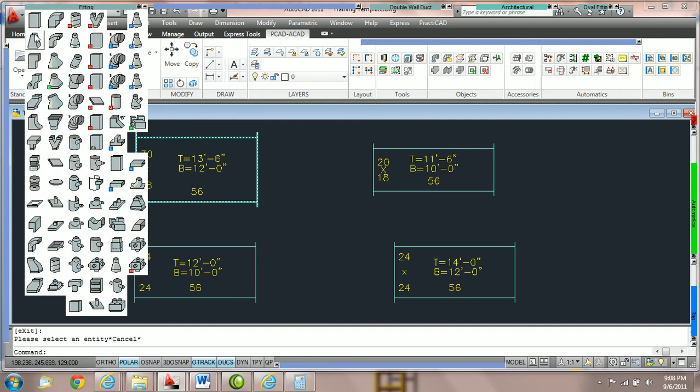The first thing you must look for is to make sure that when you attach duct, you always have your O snaps on. If I do not have O snaps on, when I go to grab a transition, I will be unable to even snap to the duct that I'd like to attach to. So I've always got to make sure that O snap is on.

I can get that on by hitting F3, which will toggle it on, or you can just come right here and press it and turn it on when you need it.

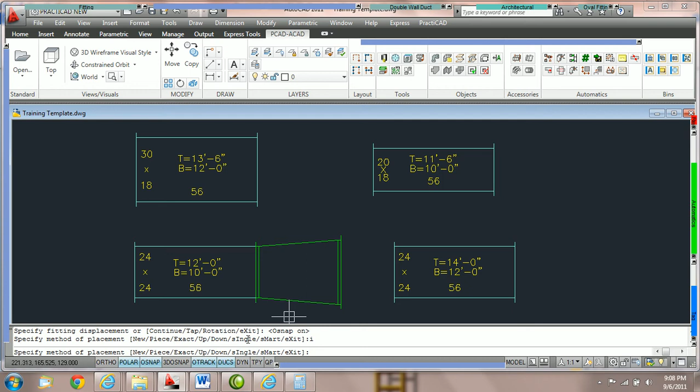Once your snaps are on, you should be able to snap directly to one fitting. And then, of course, by hitting I and spacebar to switch it to the single method, notice that I've got it on single now. I can now come over and easily attach to the other fitting.

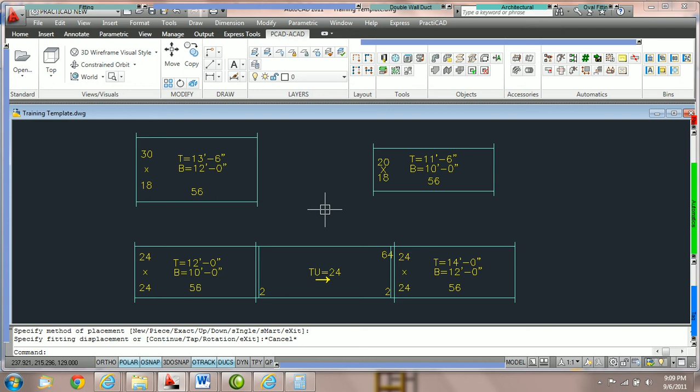However, there are multiple cases where you might not be able to attach duct between two fittings based on a variety of parameters. The easiest solution, the first thing to look for whenever your duct does not attach between two points, is to make sure that you drew your in and out connections correctly.

For example, up top here you can see that when I click on the duct, I have a blue arrow indicating the out joint or airflow of this fitting. If I actually go to click on this fitting, I have the out joint pointing in this direction.

So if I go to attach a transition, I am not attaching the in to the out. I'm trying to attach the out to the out. And there are options in PractiCAD, covered in other tutorials, that prevent you from attaching duct out to out. So in this particular situation, you would not be able to attach it.

The other reasons are either: A, your offset to width parameters are not set high enough. B, the length of your fitting you're trying to route with is larger than the gap it's trying to cover. Or C, you're using the wrong fitting or you don't have it rotated correctly.

So first we're going to go over the explanation of offset to width parameters.

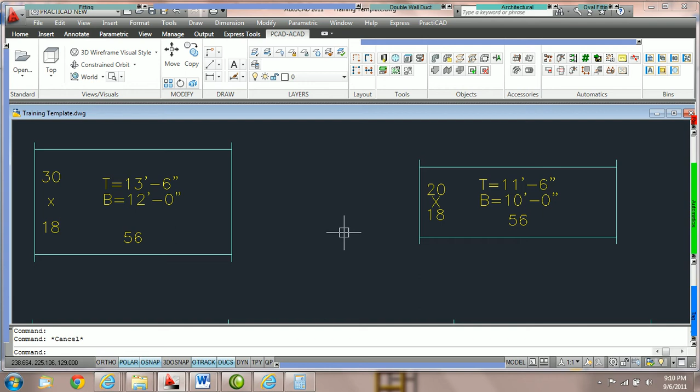PractiCAD gives you the ability to attach a single fitting in between two entities. However, you must make sure that some of your PractiCAD settings are set to allow for this. PractiCAD has the ability to prevent you from putting fittings on the drawing that might choke.

For example, currently I have a piece of duct that's 24 by 24, bottom at 10 foot. And I want to attach it to another piece of duct that's 24 by 24, bottom at 13 foot. Now notice here that we have dimensioned the offset width. The offset width is 3 feet from this center line to this center line.

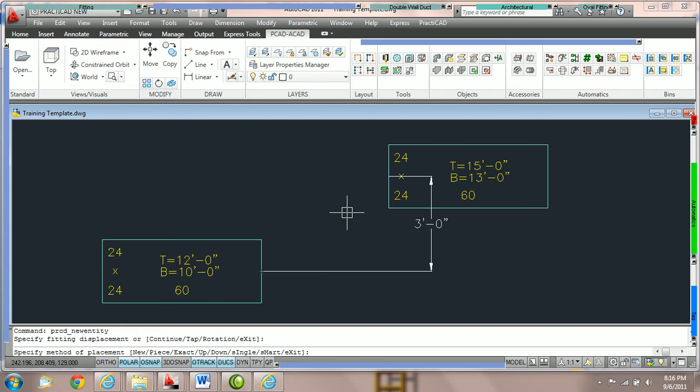I'm going to come up here and grab a transition. I'm going to move over to my box, check single, and now what we're going to do is bring my transition to the first piece. When I click, you'll notice that it snaps to the first piece. Now I'm going to bring my cursor up to the next fitting, but notice that it's not attaching.

The reason why it's not attaching is because my offset to width parameters, or my offset to depth parameters, the ratios are not set high enough.

To change the settings, you must go into your auto duct icon on your PractiCAD ribbon, the auto duct icon. I'm going to click on it once. Now, though there are numerous tutorials on this section, this tutorial is only to explain the importance of the offset width and depth parameters.

Notice here when I'm routing single wall duct rectangular that PractiCAD is giving me a list of different parameters which are dictating the route I'm trying to make. Whenever we go to make a route in PractiCAD, whether it's exact, smart, any one of these routes, it's taking the parameters and choices from this auto duct section. Notice that we've got sizing and offset.

Sizing is used for differences between transitions. Usually it's only a size change. Usually the center line of one duct and the center line of another duct are lined up, however one duct is smaller or larger, so that's a size change.

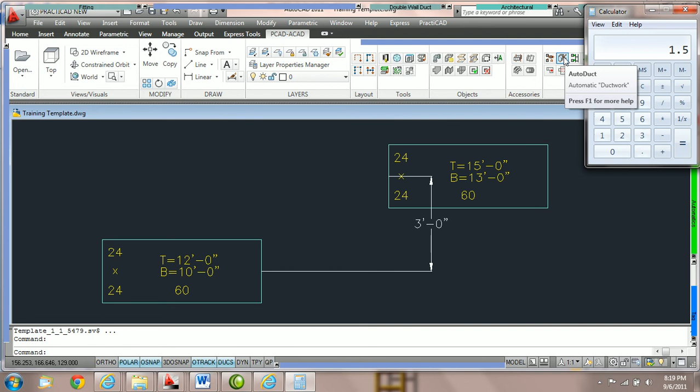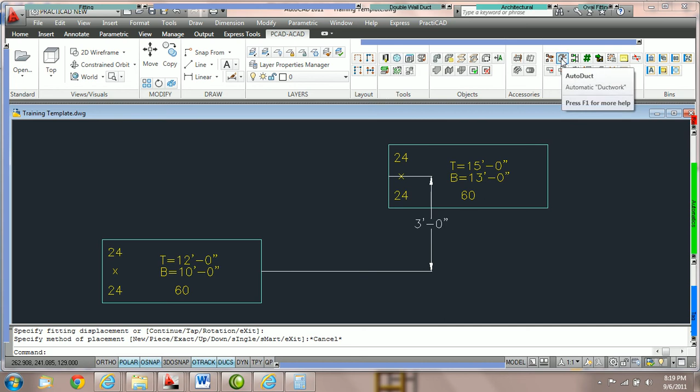This means the ratio I set in my auto duct is actually too low. So if I go to grab this transition and snap to one, then try to bring it to the other, it does not attach. So we need to come back into our auto duct button and change these parameters.

We're going to go into routing, single wall, rectangular. Recognize that you have round and oval here as well. We're going to go into offset, and where it says offset to width, we need to make it at least higher than 1.5.

Now my recommendation is to leave these numbers high. At all times, it's better usually to just have PractiCAD attached between the two fittings at any offset and then edit it later. The recommended settings are to keep this number at a minimum of 8 and 8, or 10 and 10. That'll usually make sure that no matter how great the difference is in height, or how great the difference is in the X or Y plane in terms of width, it's always going to connect the transition. So I'm going to set maximal offset to width and depth ratio to 8 and 8.

It's also recommended underneath sizing to do the same. Here you can see under sizing we have it at 1 and 1, which is only going to allow for a very small offset. We're going to change it to 8 and 8. I try to leave these settings in place at all times. The first thing we check if we cannot attach a duct using the single method is the offset to width and depth ratios. So we're going to exit out, and now we've got them set high.

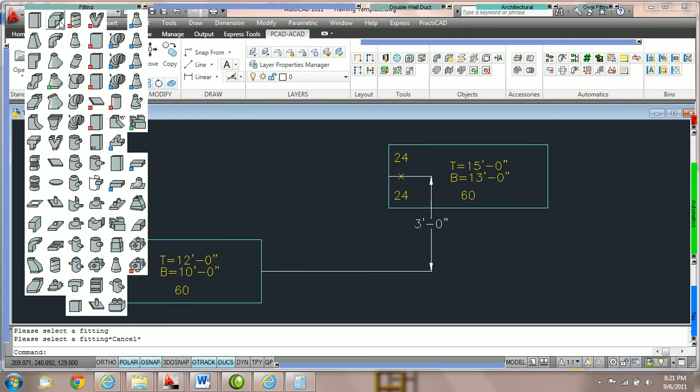Now we're going to go back and grab the transition out of the fitting bin. We're going to snap to our first point, and now notice that the second we bring it to the other point, it will connect. Because we changed the offset to width ratio, which is 3 foot over the width of the fitting we're attaching to, so 3 foot over 2 foot. And of course you have the offset depth ratio as well.

Notice the difference between this duct being at 10 foot and this duct being at 13 foot. The offset depth is 3 foot. And if you put 3 foot over the depth of the fitting we're connecting to, it'd be 3 foot over 2 foot. So in other words, we need to have our offset to depth ratio, as we showed with our calculator, at least greater than 1.5.

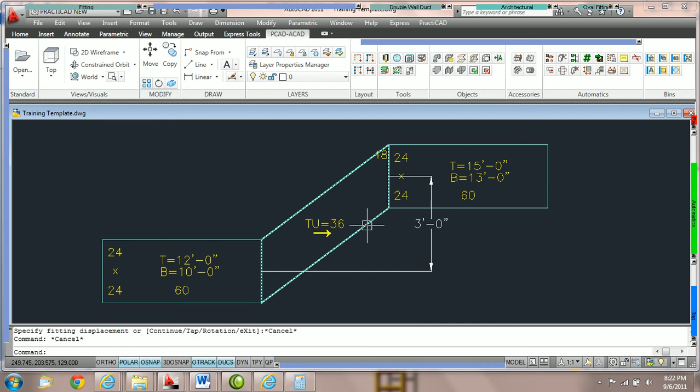Once again, generally leave those settings very high. It'll allow you to attach any two fittings between large distances, and then from there we can always double click on the fitting itself and go into our editing options if needed. That is the explanation on the offset to width and depth parameters.

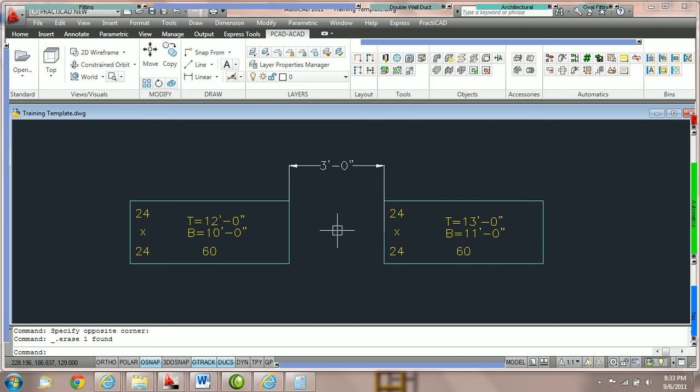Another reason why your duct might not connect when you're trying to work on single is the fitting you are holding could be longer than the gap you're trying to cross. For example, in this tutorial we have two pieces of duct. One is at bottom 10 foot, and 3 feet away we have another one at bottom 11 foot. So there's 36 inches between them.

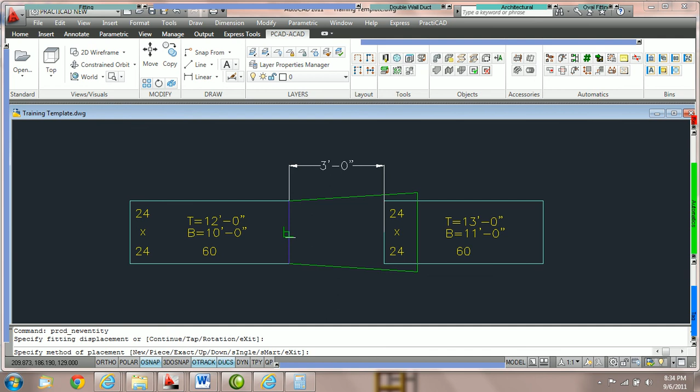I come up to the fitting bin and select a transition. Here we'll use the finished length transition. I click onto the first joint and PractiCAD snaps correctly to it. However, when I go to the second joint, PractiCAD does not attach. The reason is the fitting I'm holding, as you can see here, is larger than the gap we're trying to cross. You'll notice that I had saved the transition as a default with the length at 48.

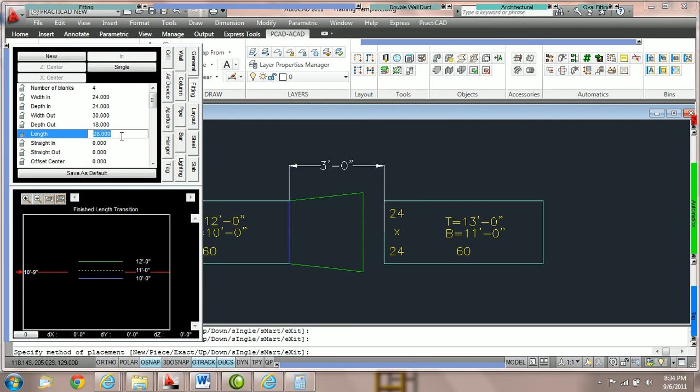Therefore, PractiCAD is actually trying to connect to the next nearest point, which would be after this node here. All we need to do if this situation happens is lower our length with the wheel mouse, just so it's shorter than the gap, and then attach. And PractiCAD will attach it easily.

Another tip when routing with single is to make sure that the fitting you're actually trying to attach between two points is capable and has the proper properties to attach between the two points. In this example, we've got a fitting on the left at 10 foot and a fitting on the right at 12 foot. Their center lines are even, so the only difference is the elevation change.

The fitting we're going to try to attach with is the finished length extra straight transition. I'm going to click on it once. Now I'm going to click on my first attachment point and click once. Then I'm going to bring it over to try to attach to my second attachment point, and you can already see that PractiCAD is not allowing us to attach this fitting.

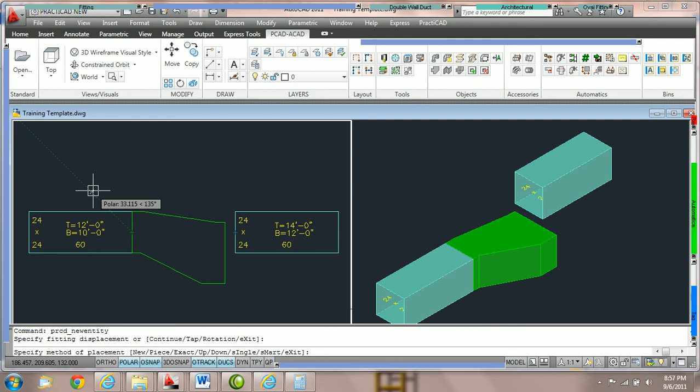The offset to width parameters are already high and have been set properly. You'll notice that the length of this fitting is shorter than the gap. So what would prevent it from attaching? Well, this particular fitting has an offset center, but it does not have a center change. In PractiCAD, offset center dictates the offset left to right, and center change dictates the offset up and down.

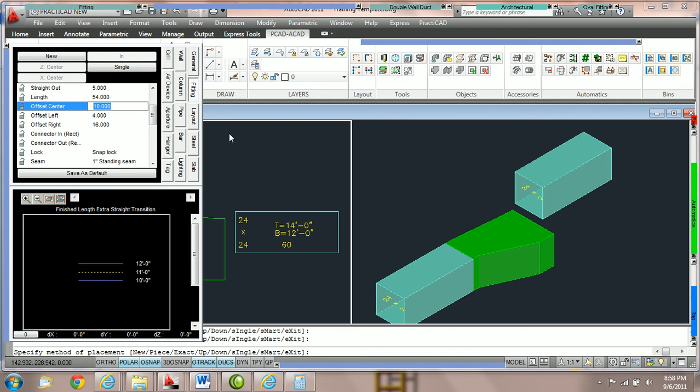Because I've already attached this fitting to move left to right, it doesn't have the ability to break twice. So though I can move the parameters here up and down to offset it left and right, it will not break up. However, to make the fitting break up, you're always capable of going into your direction box, rotating the duct at 90 degrees, and then you can attach the fitting and PractiCAD will fill it in with the proper offset center.

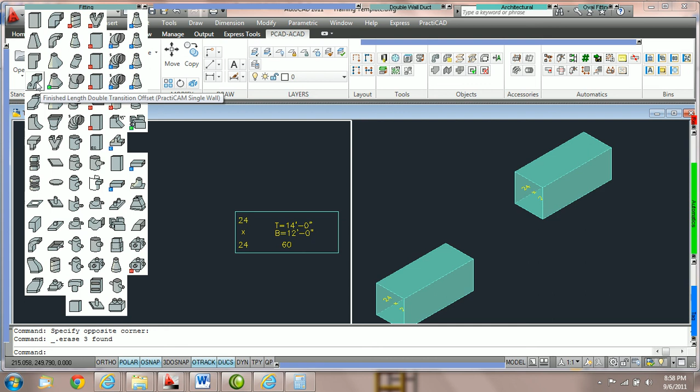Also note that some fittings have 2 offsets. We're going to use the finished length double transition offset. This fitting has two offset parameters. First, we have the offset parameter for offset center, which is left to right. And then we also have the parameter for center change, which breaks it up and down. So this fitting can be broken both ways.

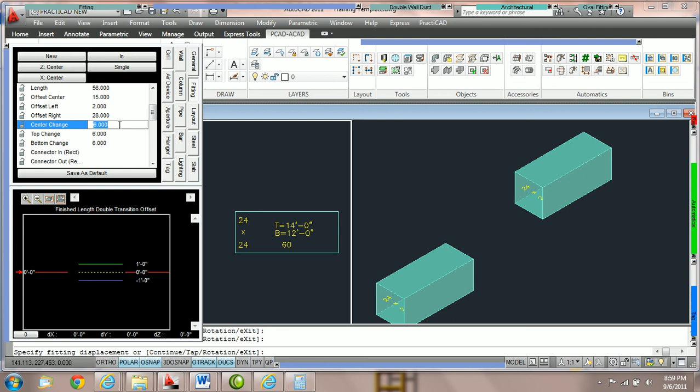However, it's normal to have the OG portion of the fitting in an elevation change such as here. The OG portion of the fitting is usually the top and bottom of this duct. So what we would do is come in, snap our OG transition to one side, make sure that the length is shorter than the gap, and then rotate it 90 degrees. Once we do that, we'd be able to snap to the endpoint node and PractiCAD would attach the OG, and now it has the curved OG portion at the top and bottom.

So this is very important to look towards when you go to attach duct. This is also a great exercise to attempt yourself.